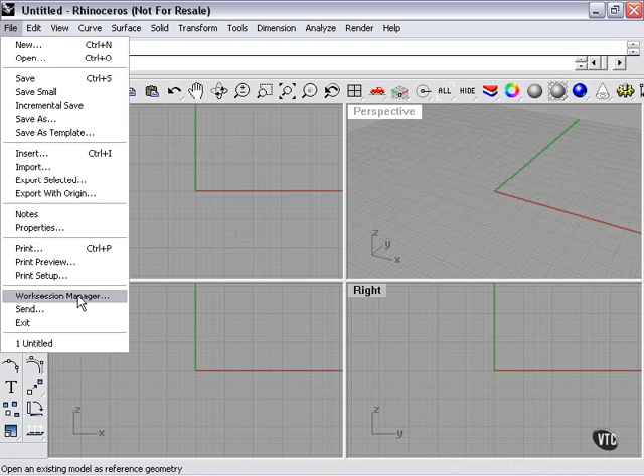If I go up here to my File menu, I have different save options: incremental save, save small, save as template. That will create a new template you can use for any new document in Rhino. Your insert, import, export, properties, work session manager. A lot of these things you won't be using very often, and some we'll get into more detail later.

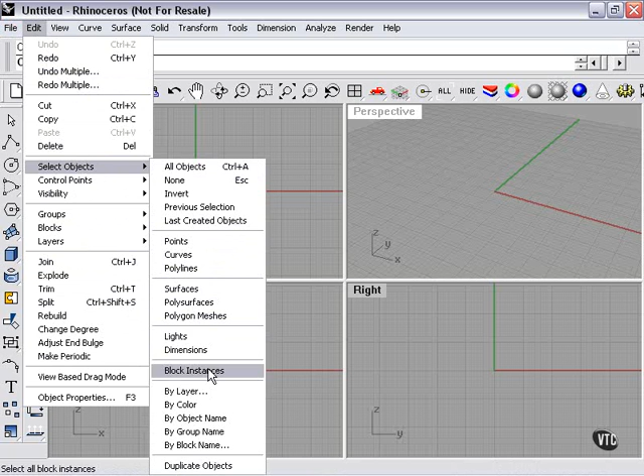Your Edit menu has your basic undo and redo. You can undo several steps or redo several steps with the undo or redo multiple. Selecting objects allows you to select only specific objects in your scene. You can select them by layer, by color, or by type of object.

Your control points options have some useful things, like selecting connected control points. I'll show you how that can be used a little bit later.

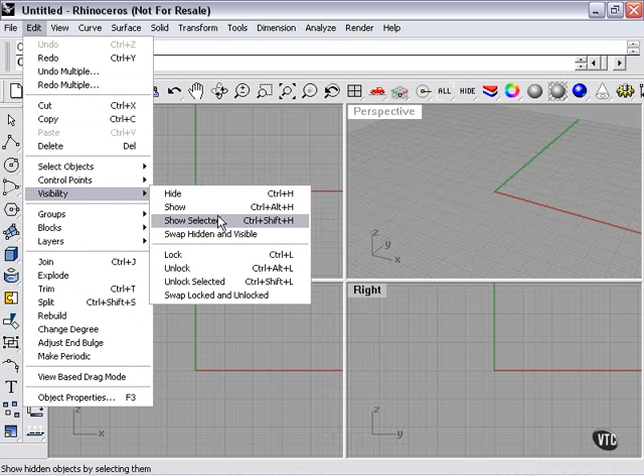Visibility will allow you to hide or show certain aspects of your scene, which can make for faster rendering. Groups, blocks, layers, basic tools like join, explode, trim, and split. A lot of these tools are also found on the menu bar here, for example your explode and split tools.

View has your viewing options, some viewport options, C-plane options, and camera options as well.

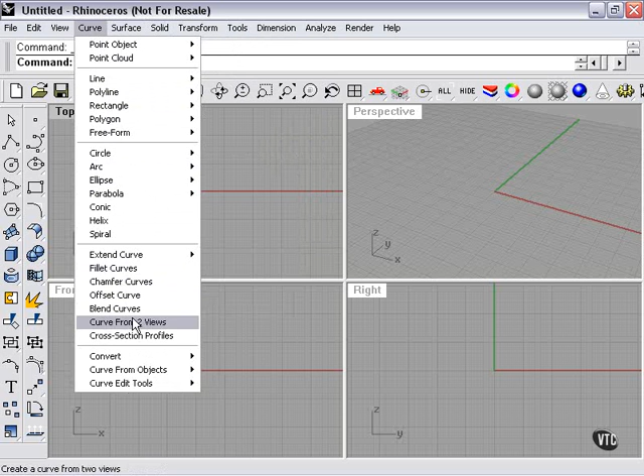Now the curve, surface, and solid menus up here are probably going to be the three you use most often. On your curve menu, you have all sorts of options for creating curves: circular curves, arc curves, ellipses, straight lines and polylines. Down here you have tools for using with curves: extending, filleting, chamfer, blend. A lot of these are very useful tools we're going to get into in much more detail.

Surface menu, you have the same thing here. You can create a plane, an extruded surface from a curve, edge curves. Surfaces are generally basic shapes created directly from curves.

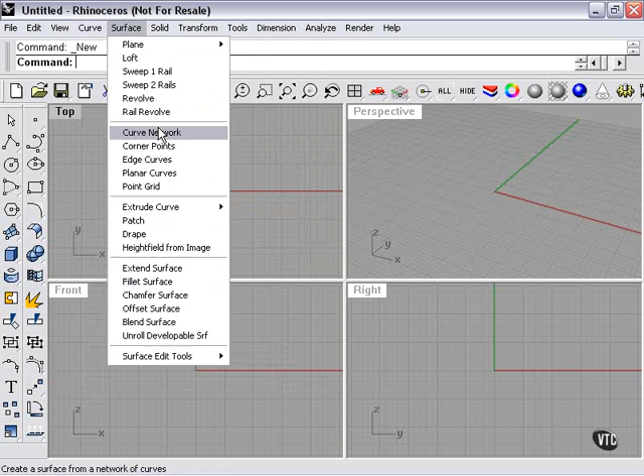And then your Solids menu. This is what we call primitives: boxes, spheres, cylinders, cones, truncated cones. Primitive solid shapes which enclose a volume. And again, we have tools for the solids down here in this section.

Your Transform menu will help you bend and twist shapes. You can also orient them on another surface — for example, if you created a sphere and wanted to copy it many times over a hill shape. Your array tool is here, along with setting points and projecting to C-plane. C-plane means construction plane.

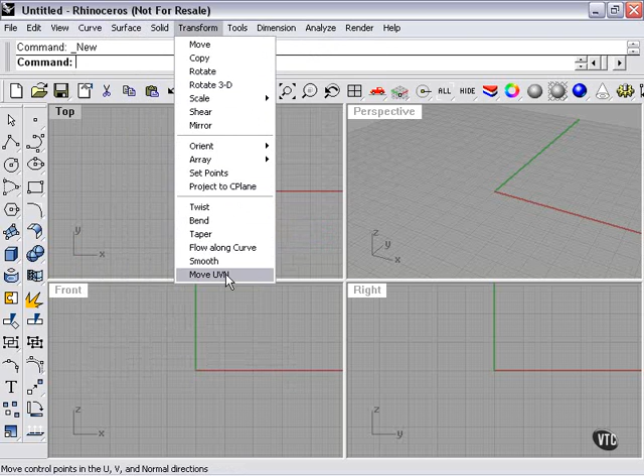Then you have more tools here in the Tools menu: Object Snap, and your polygon mesh tools, which you'll use when you want to turn your NURBS shapes — shapes you've created from curves — into solid polygon mesh items, which could then be exported.

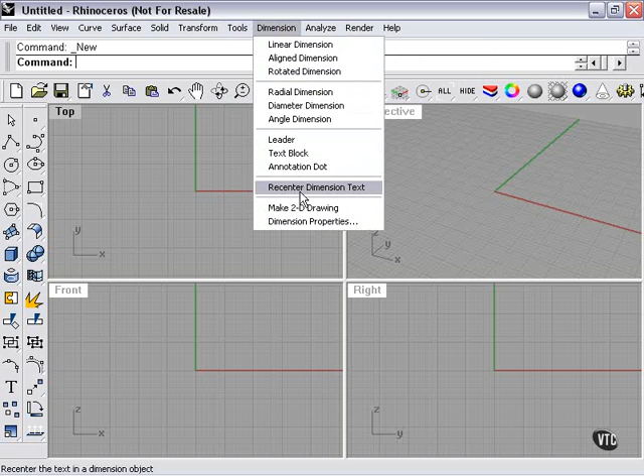Dimension is where you have your linear, aligned, rotated dimension, 2D drawing options. These would help you with electrical drafting, for example, or very exact, precise measurement type work. Analyze gives you properties and statistics for area, length, distance, edge tools, and diagnostics. We won't be getting into the Analyze menu except briefly.

And then, of course, your Render menu. Rendering is what you're going to do when you want to preview how your object is going to look with colors, textures, and lights.

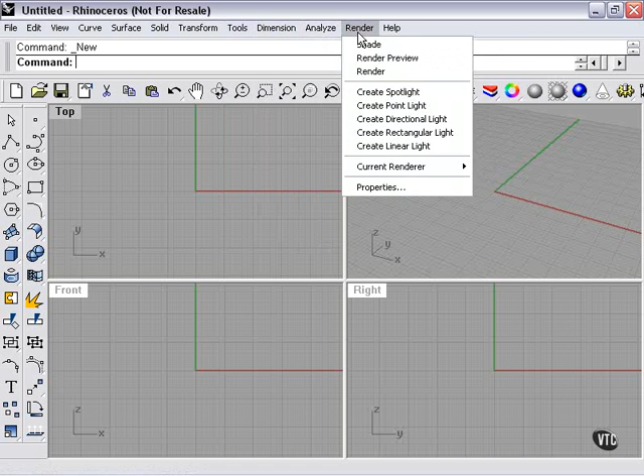Then, of course, Help. Here we have the command line, and in this one I can type any command. As you can see, if I type the word 'set,' it will bring up a panel showing me different commands that use the word set. A lot of these commands can be accessed using tools, tool buttons, and menus, but some cannot.

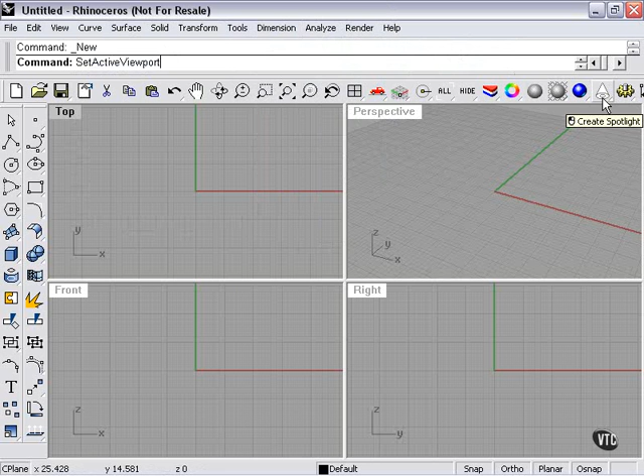The buttons here mimic a lot of the options I just showed you at the top. You have your document properties, render options here, shading, object properties, layer properties. We're going to be getting into all of these later on in the tutorial.

Here we have zoom, pan, rotate, your camera options, clipping, cutting, pasting, Save, Open, and New. And then down here you have your tool buttons. Again, most of these tools are found here as well as here.